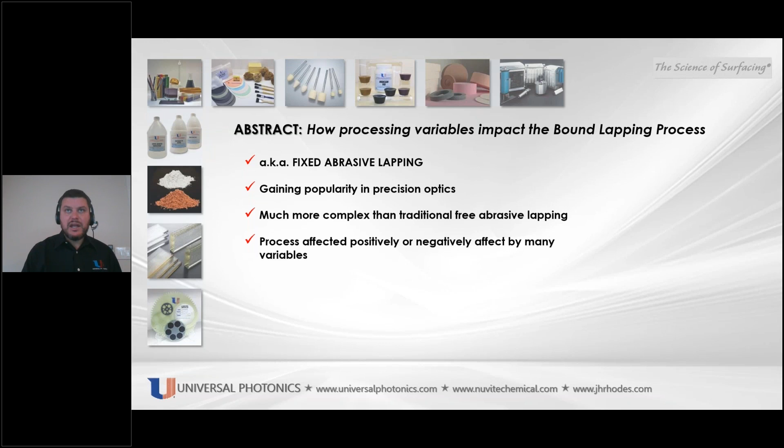It's important to understand how process parameters affect your process, including coolant type, working pressure, usage of a conditioning particle, and platen speeds. In this study, we will show how changing each variable can positively or negatively affect your lapping process.

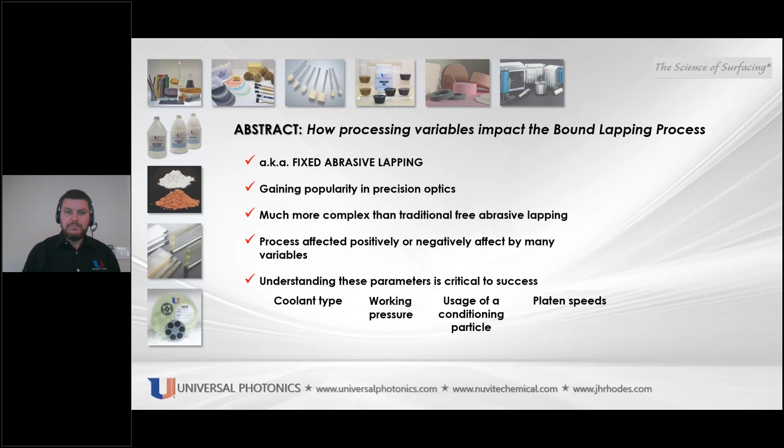Fixed abrasives contain abrasive grains that are bound together by agents such as binders, fillers, or other forming agents into defined forms. Typically there are 2 types of processes.

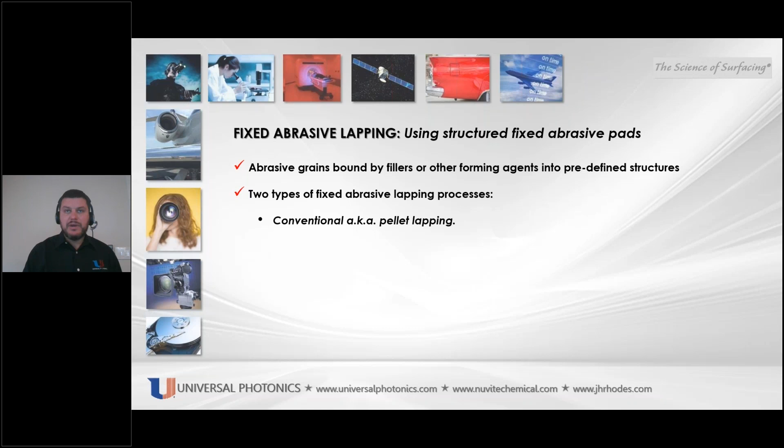There's the conventional fixed abrasive lapping, aka pellet lapping. In this process, the diamond or any other abrasive is incorporated into small pellets, which can be either metal, vitreous, or resin bonded, attached to cast iron machine platens.

The second is structured fixed abrasive pad lapping. This process consists of an organic polymeric binder and an inorganic abrasive mineral, in this case diamond, composite, which is formed into a structured 3D pad.

In this presentation, we will be discussing structured fixed abrasive pads, in particular, the Trizact 677XA pads manufactured by 3M Corporation.

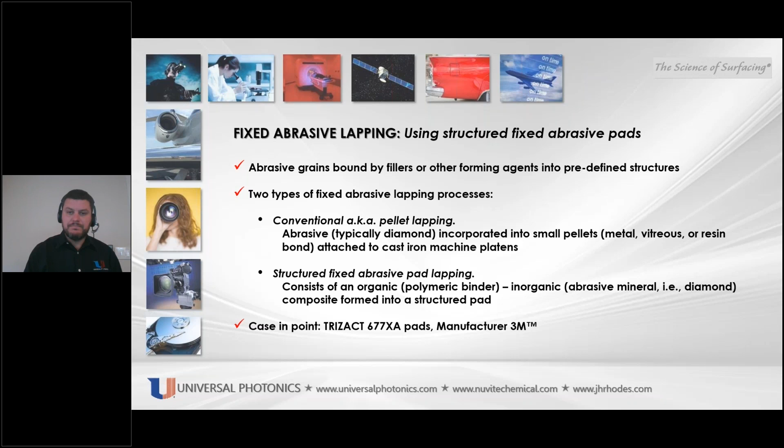If you're not familiar with Trizact, I wanted to give you a few images. On the left here, you can see the Trizact diamond tile attached to the bottom plate of a double-sided lapping machine. Let me zoom in here a little bit so you guys can see it better.

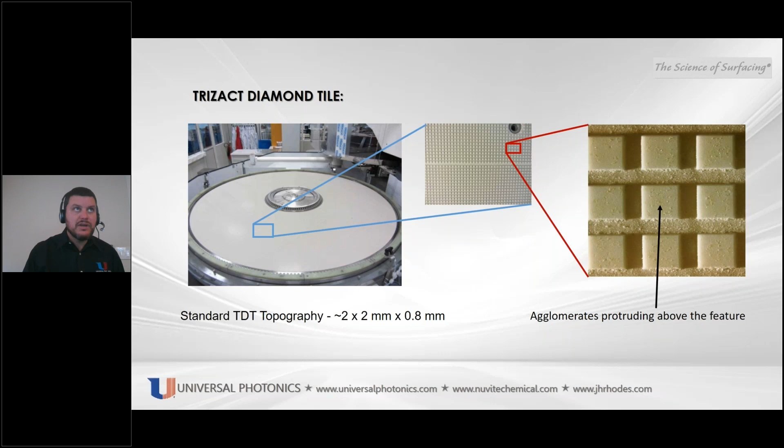If we move a little bit to the right, you can see we zoomed in. You can see the individual tiles there. The typical Trizact size is 2 millimeter by 2 millimeter by 0.8 millimeters thick.

If we zoom in even more to the microscopic view, you can actually see the diamond agglomerates coming out of the surface of the tiles, or what we call the features.

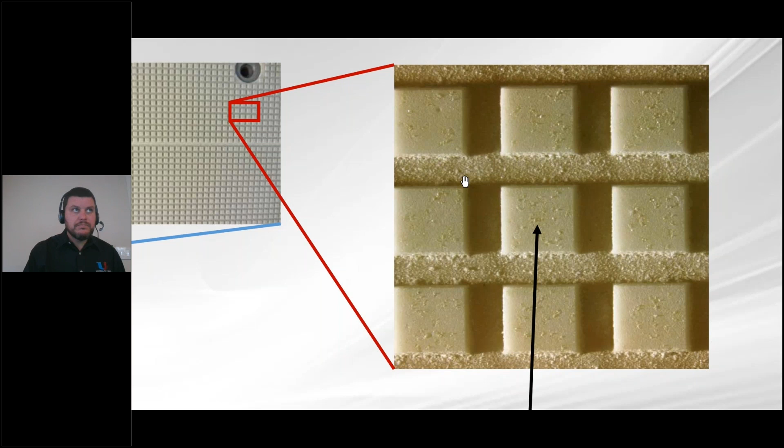Swarf is very important for most fixed abrasive lapping processes. Most fixed abrasive lapping pads are designed to wear slowly from glass chips, which is also known as swarf. The swarf formed during lapping serves to wear the pad and to expose fresh diamond.

Without the swarf, the diamonds will slowly dull. Eventually, your removal rate will drop to close to nothing, but your surface quality would be very good. On the other hand, if you have too much swarf, the pad will wear too fast, and the cost of ownership for the pad becomes too high for most companies.

It's important to note that hard to grind materials such as ceramics and sapphire do not generate swarf large enough to cause pad wear. So a conditioning particle must be used in conjunction with the coolant.

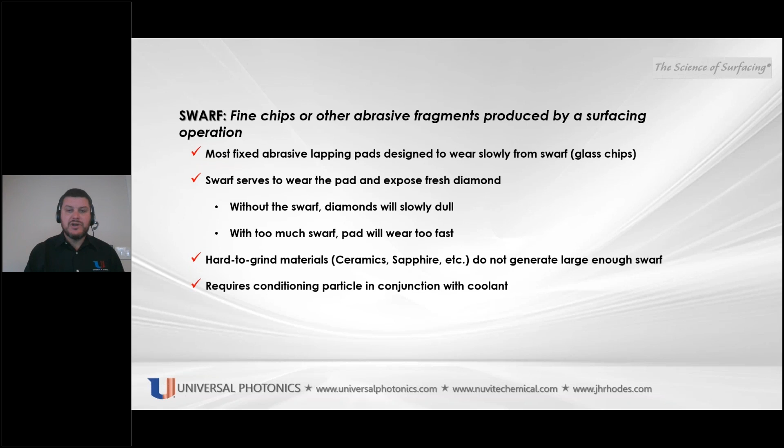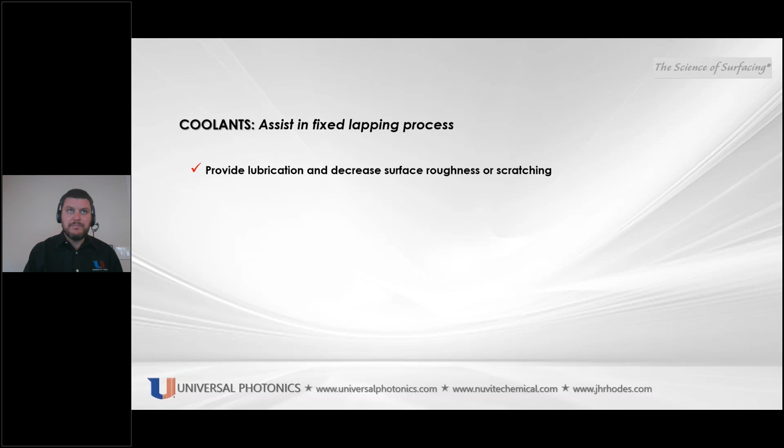Coolants assist in the fixed lapping process in a few different ways. They provide lubrication and decrease surface roughness or scratching. They also help to suspend swarf and to increase removal rates through higher pad wear.

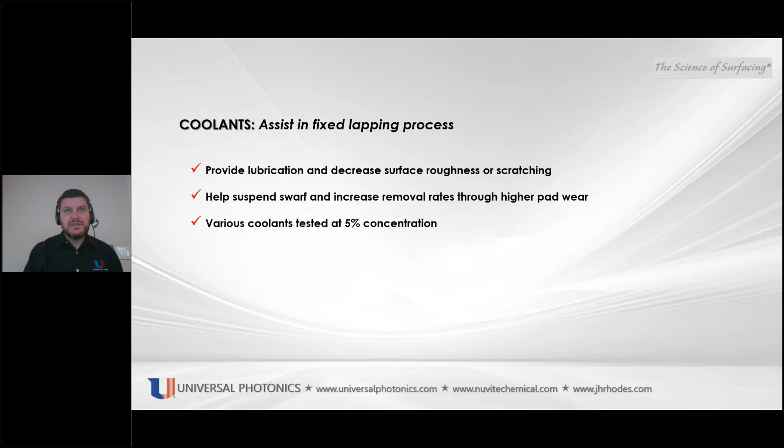In these trials, we tested various coolants from different manufacturers, all at a 5% concentration. These coolants are Sabre Lube 9016 from BASF, Microcut 28S from Integris, Diamond Kool and Bluekool from Universal Photonics.

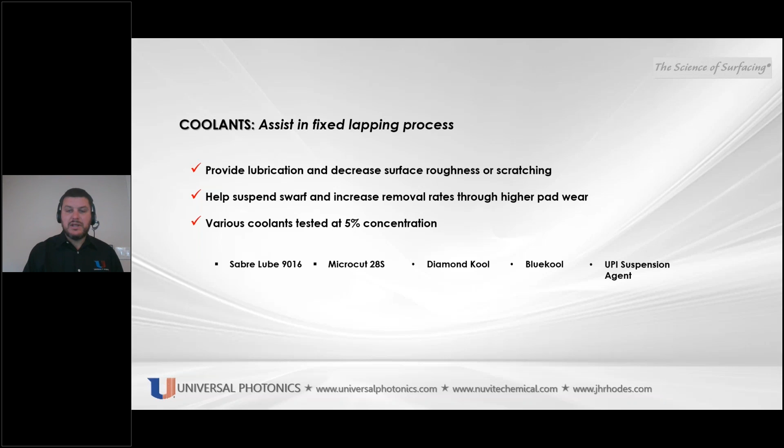We also wanted to study the effects of a pure suspension agent. We have a suspension agent in R&D at Universal that's actually made for a completely different application, that contains no wetting agents, no lapping fluids for lubrication. We wanted to study what the effects of just suspending the swarf would be on the lapping process.

So to give you a background of our testing, all of the testing was performed on a double-sided lapping machine. Each trial was run for 60 minutes. The machine we used in particular is the Somos TPM 400A lapping machine. The removal rate was measured every 10 minutes, and the surface quality was averaged for the last 30 minutes. All processing parameters were kept constant except for one. The varied parameters are coolant type, working pressure, the usage of a conditioning particle or no conditioning particle, as well as the platen speeds.

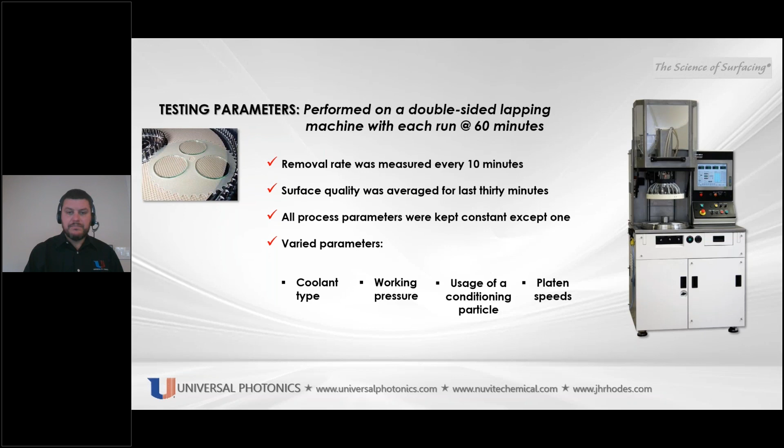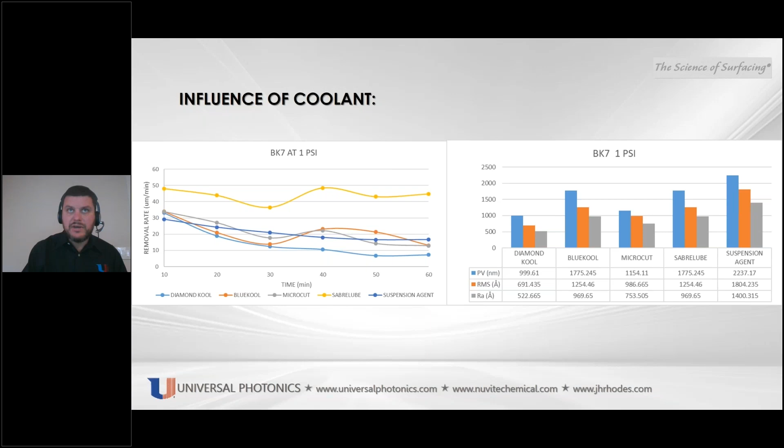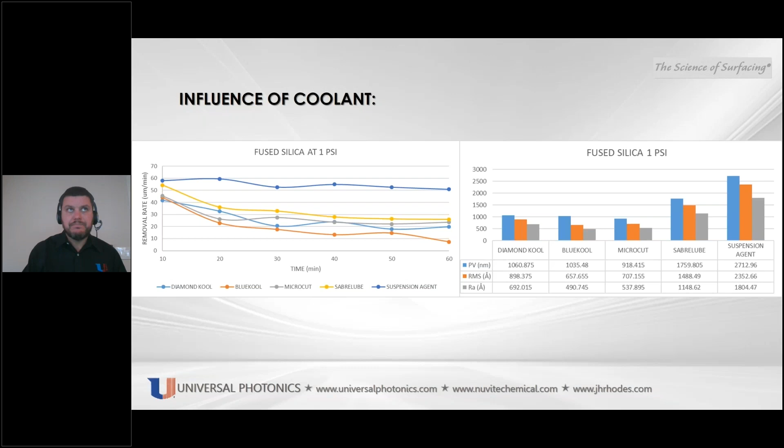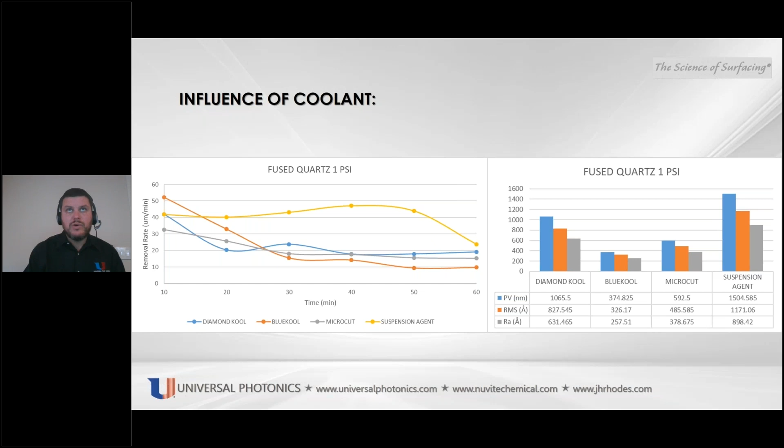Just want to put a side note that getting surface roughness this low is extremely useful if you want to measure flatness on an interferometer before going to polishing. So if you're really fighting to achieve excellent surface flatness in your lapping and polishing process, it could be extremely useful to have an idea of what your flatness is heading into polishing, to make sure you're not trying to do the shape change in polishing where the removal rate is slower. You can see with this process that the removal rates dropped steeply for all coolants, but again they somewhat stabilized eventually.

Okay, so next, the fourth material we tested to see what the influence of the coolant type was sapphire. It's important to note that this is C-plane sapphire, and this is actually Trizact 20 micron, while all of our previous testing on the glass was Trizact 9 micron. Also, as I mentioned earlier, sapphire and ceramics tend to not wear the Trizact pad well enough on their own from the swarf. So we did use a conditioning particle of 0.5 weight percent, Microgrit WCA 15T.

So you can see here that Diamond Kool definitely had the highest removal rate, and as expected, it did have a slightly higher surface roughness. Again you see kind of a big drop - it looks big on the chart anyway, but we're only talking a few microns. Generally, the removal rates were somewhat stable after the 30-minute mark.

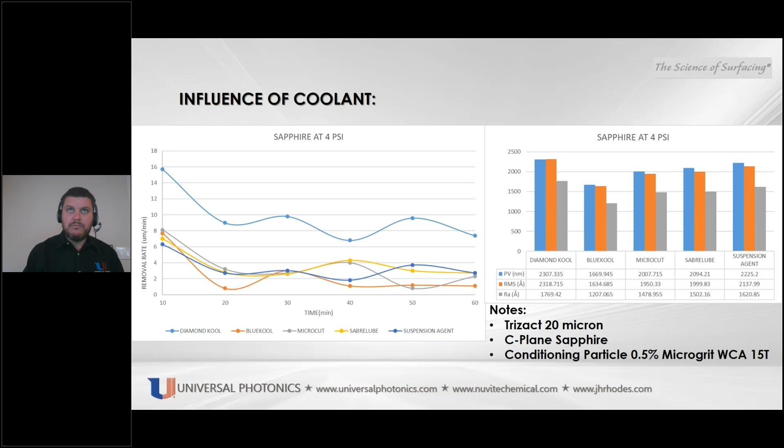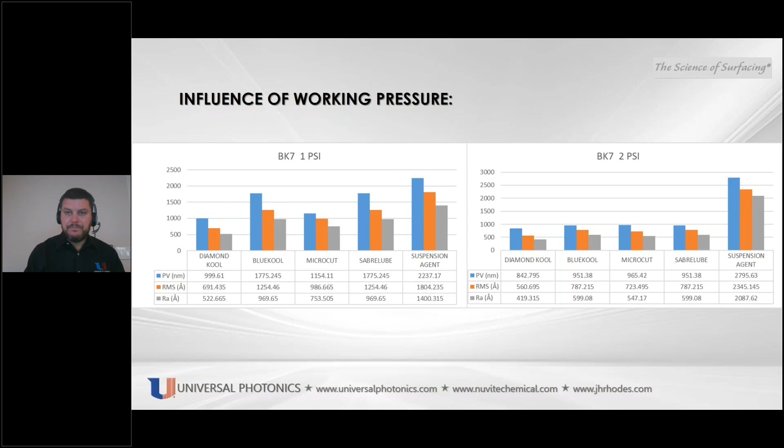Okay, so again we wanted to look at the influence of working pressure, but this time with fused silica. On the left you can see the removal rate for 1 pound per square inch, and on the right, the removal rate for 2 pounds per square inch.

Actually, the suspension agent was probably the best at 1 psi, but the other coolants caught up interestingly enough once we increased the pressure. You can also see on the plots on the right that the removal rate was much more stable at 2 psi. So it seems for both glass types, running at a higher pressure seems to be more stable for your process.

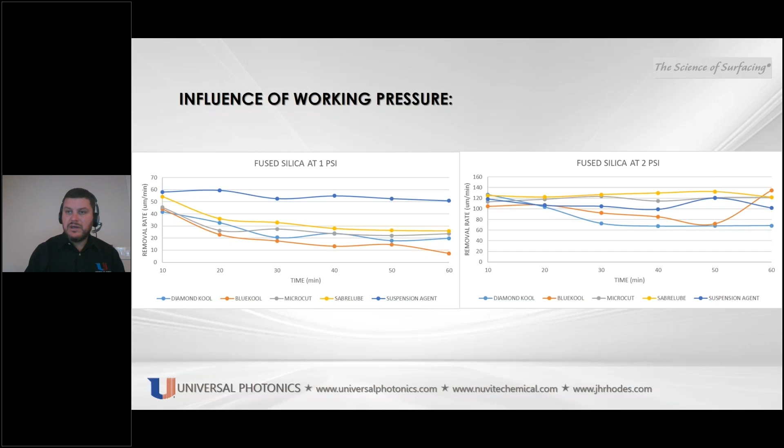Okay, so if we take a look at the surface quality results, more predictably, increasing the pressure increased the surface roughness almost across the board, again minus the suspension agent, which was kind of the one outlier. Diamond Kool actually still had the best surface roughness at 2 psi and was just a slight bit lower than the rest of them.

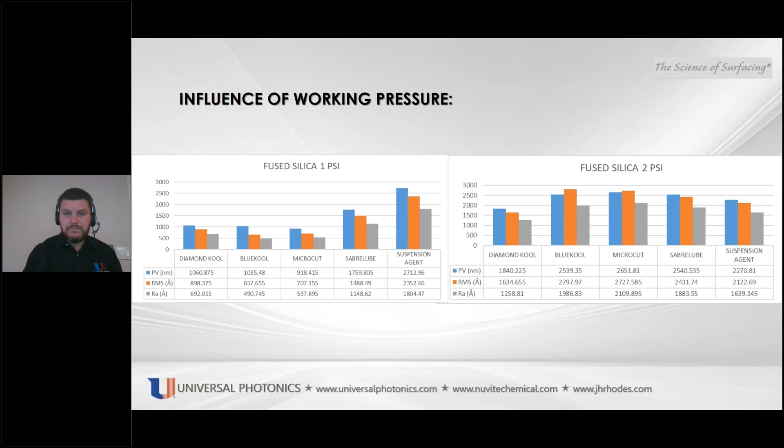So the third trial we wanted to run was to see the influence of a conditioning particle when running glass, in this case fused silica. We ran the exact same process using Trizact 9 micron, once with no Microgrit, and then a trial using Microgrit at 0.5 weight percent, which was the WCA 5T.

So the green plot on top, which includes the conditioning particle, shows how stable the removal rate became over time. It started off at 60 microns a minute and dropped down to 50, and generally after that first 10-minute mark, it pretty much stabilized.

Using a conditioning particle does require constant mixing of the powder and the coolant, which is important to note. The surface roughness did increase a little bit, roughly 2x, when we added the abrasive or conditioning particle to the coolant. I think adding a small amount of abrasive, if it's okay in your process, can help you achieve the best of both worlds: a very stable, high removal rate with still excellent surface quality.

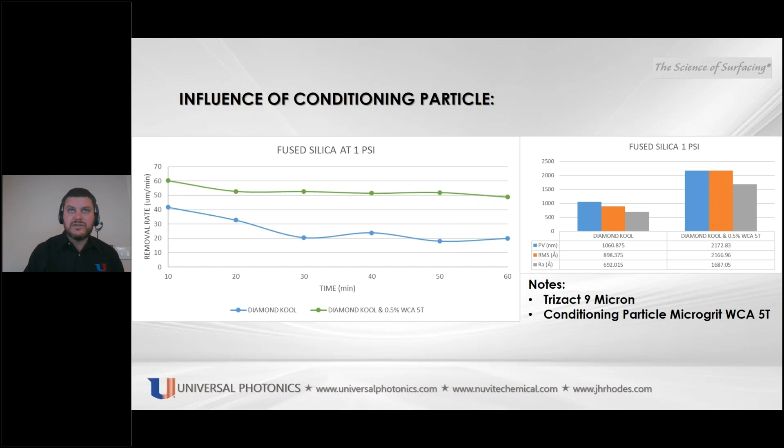So as I mentioned with ceramics and sapphire, we generally do not run without a conditioning particle, but we wanted to test how the weight percent, or amount of conditioning particle added to the coolant, would affect your lapping process.

So again, this is with Trizact 20 micron, on C-plane sapphire, and the conditioning particle is Microgrit WCA 15T. We varied the weight percent from 0.5% to 1% to 2%.

Interestingly enough, the 1% and 0.5% followed the same path on their removal rate, starting relatively high at 10 minutes, dropping down at 20, then bouncing up in a kind of sinusoidal curve. But at 2%, the removal rate was pretty stable over time, only varying by about 1 or 2 microns. That's particularly interesting to note.

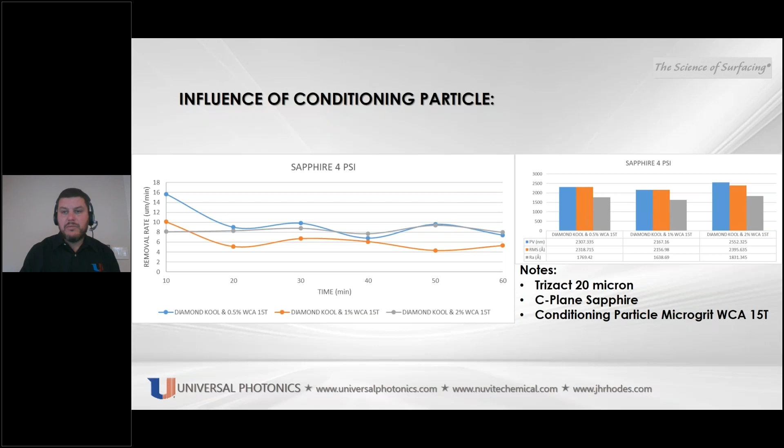So the last test we wanted to run was to see the influence of plate speeds. We kept everything constant except for the top and bottom plate speeds and RPMs, while keeping the directions, gear speed, and gear direction constant.

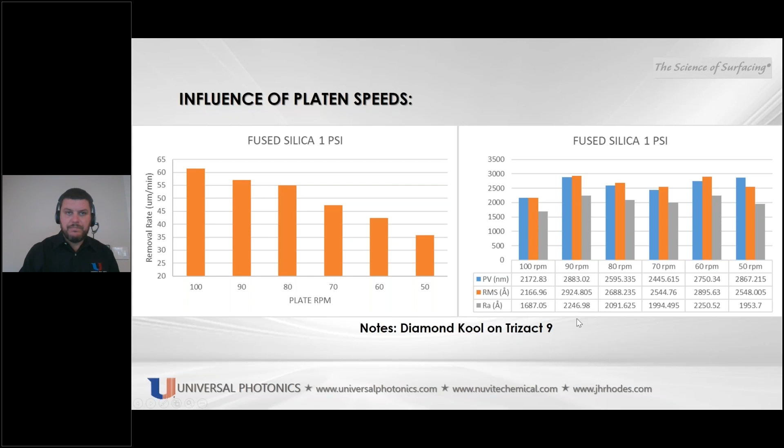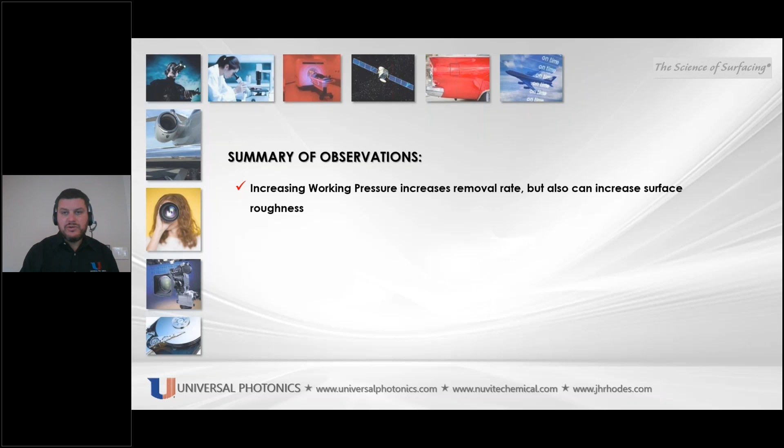So to summarize our observations from these trials, increasing the working pressure increases the removal rate, but it can also increase surface roughness. The real contrarian to this was the BK7, where we increased from 1 psi to 2 psi and the surface roughness improved.

We thought that increasing platen speed increases the removal rate but doesn't significantly affect surface roughness generally. The coolant selection for each material type is critical. If you're looking for high removal rates or best surface quality, it was pretty different from material type to material type.

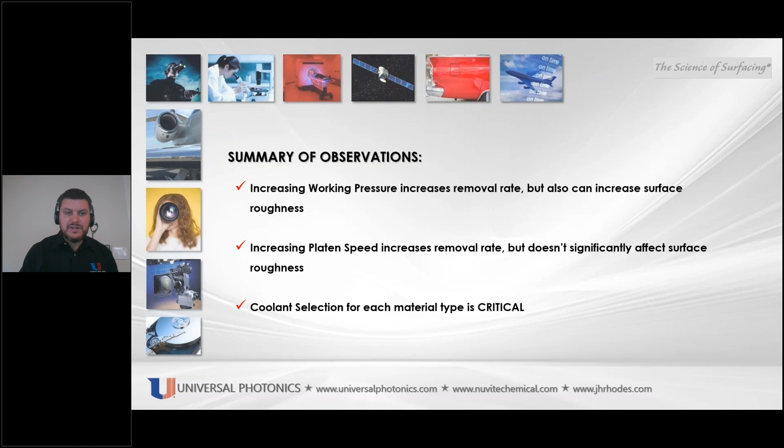Adding a conditioning particle increases the removal rate generally, but it can also affect surface roughness.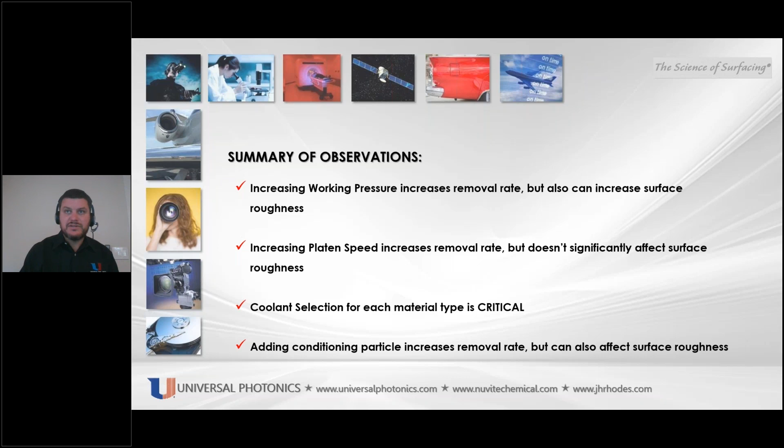One thing to think about is that the process choices you make based on our trials or using the data from our trials are dependent on your desired results. Some customers want low surface roughness, generally to improve polishing times. Others want high stock removal to lower the lapping times if you're trying to hog off a large amount of material to reach your critical center thickness.

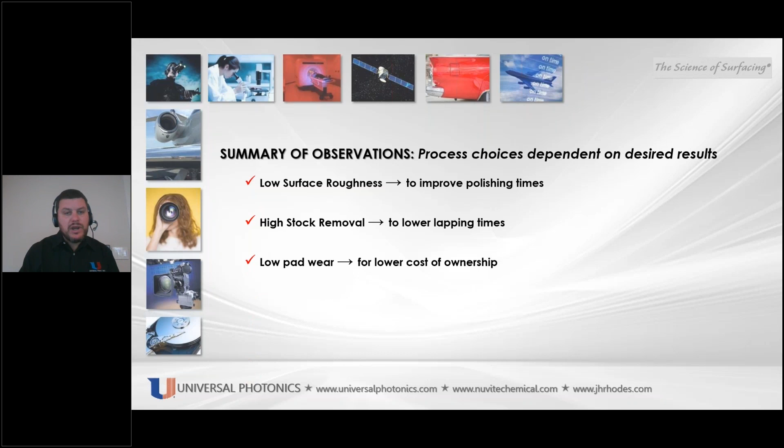Or maybe some customers want low pad wear for lower cost of ownership of the pad, to extend pad life. Personally, I think the ability to measure flatness on a standard interferometer prior to polishing is very important if you're trying to achieve tight flatness requirements. Keeping that in mind, low surface roughness would be an important process goal for your lapping.

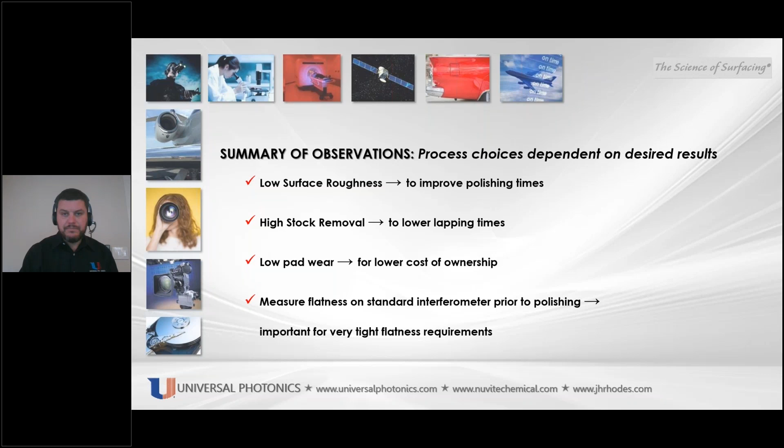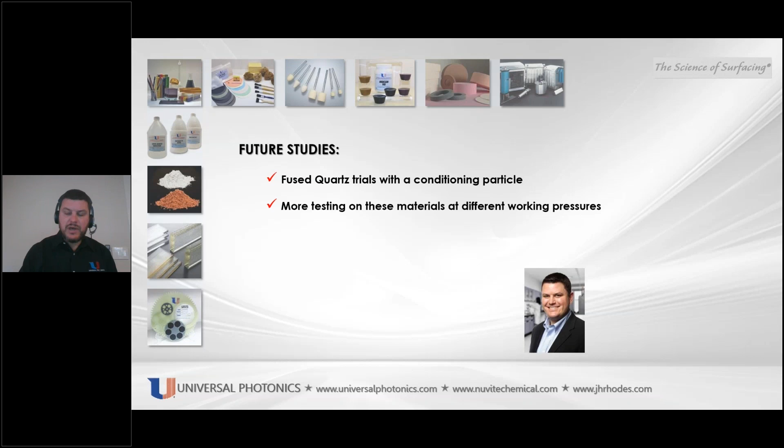We're looking to expand our studies in the future. We want to run fused quartz trials with the conditioning particle, run more testing on these materials at a few more working pressures, possibly going a little higher than 2 pounds per square inch, and test additional materials. We're looking at calcium fluoride, zinc selenide, germanium, as well as silicon.

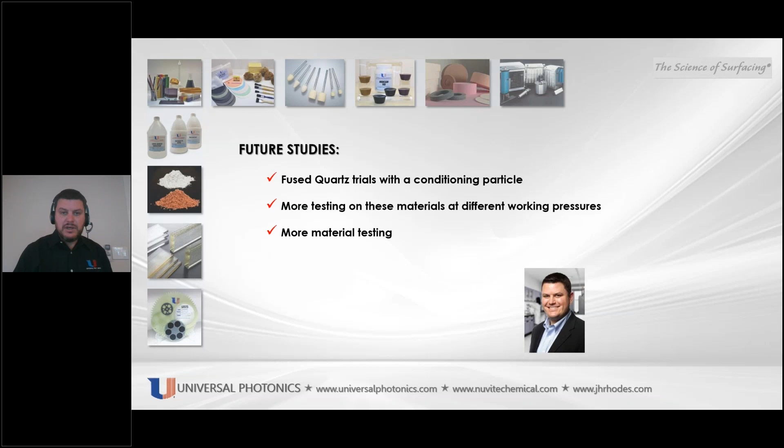So if you have any questions, feel free to call, email, or text anytime. I appreciate your attention, and thank you very much.